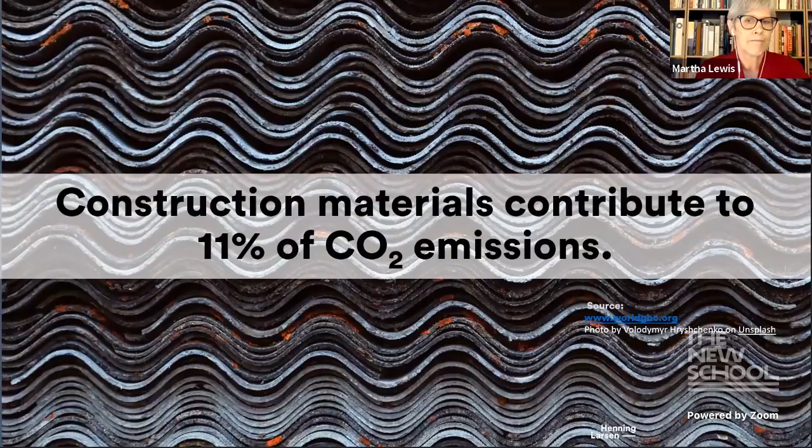The UN has high ambitions for planetary well-being, and one of these is a drastic reduction of the production of hazardous chemicals. Unfortunately, the reality is that this trend is going in the opposite direction. Global chemical usage is expected to double within this decade. This is particularly relevant for the construction industry because this sector is the #1 end market for global chemicals. In fact, it's larger than the next 3 markets combined.

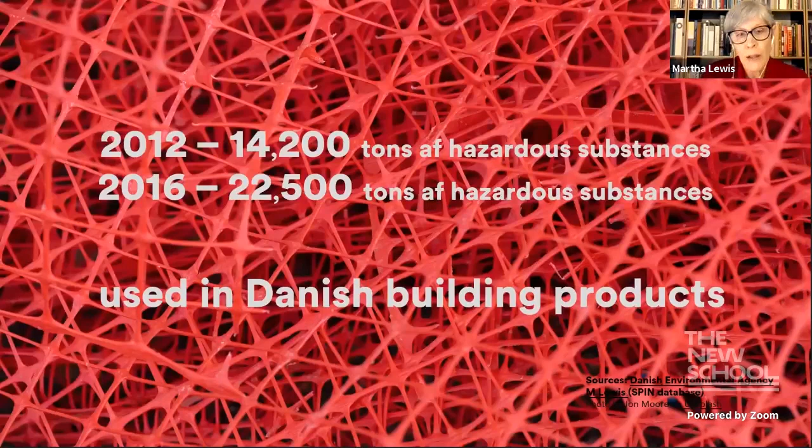Even in Denmark, there's a clear increase in the usage of hazardous chemicals in building products. From 2012 to 2016, there was a 58% increase in hazardous substances used in building products. This occurred in parallel with an increase in the amount of square footage that was built in Denmark.

The Danish EPA commissioned a survey in 2016, which concluded that there were 48 hazardous substances used in Danish building products. Substances that are, for example, carcinogenic, mutagenic, reprotoxic, hormone disruptors, or acutely toxic in water environments. The survey is interesting because it identifies in which building life cycle phase the substances are problematic. It zones in on construction, on the use phase, and on the third phase, the end of life phase.

And the results show that half of these 48 hazardous substances are problematic in the end of life phase, in the demolition phase, in the waste phase. If there is any authentic intention to limit consumption of virgin materials by encouraging recycling and reuse, then these hazardous chemicals need to get out of our recycling stream now.

Last week, a disturbing new book came out with a sober title, Countdown: How Our Modern World is Threatening Sperm Counts, Altering Male and Female Reproductive Developments, and Imperiling the Future of the Human Race. Authored by Shanna Swan and Stacey Colino, it's based on extensive research which identifies the cause of these creepy changes to be environmental chemicals. That is a class of chemicals called endocrine disruptors, which includes bisphenols, PFAS substances, and phthalates.

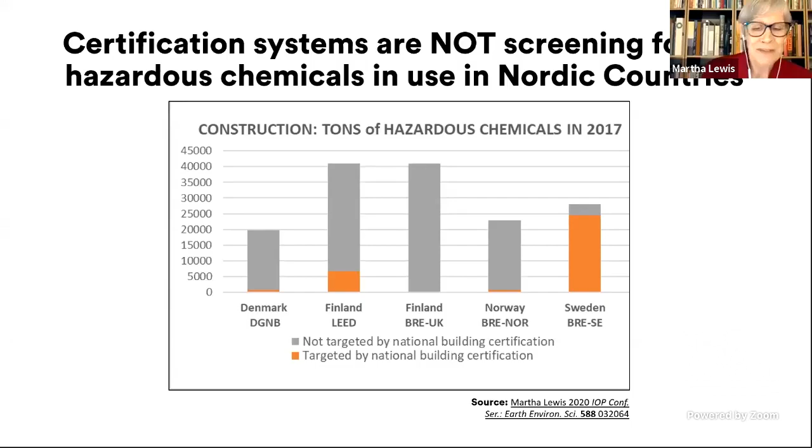So to return to carbon and the climate crisis, the building industry could be a major cog in the limiting of carbon emissions. However, it's absolutely essential that we make well-founded material decisions on the projects we are working on right now, today. The less accumulated carbon released into the atmosphere in the next 9 years means the less that has to be extracted from the atmosphere in the future.

This is one of the reasons why we encourage you to prioritize the global warming potential in the A phase, in the production phases of the products. To sum up, I strongly advise a priority list for choosing building materials that emphasizes low carbon or sequestered carbon, that screens for hazardous chemicals, and to encourage you to think design for disassembly into your details, into your specifications, into your projects. Thank you.

Pelle, it's all yours. Thank you very much. And thank you very much for having us. It's fantastic to have this kind of discussion at this time. And as I can see in the participant list, it seems that quite a number of people are joining in on the conversation. And that is definitely the experience that I am having these days, that it's gone from being a quite nerdy subject to become almost mainstream. And that is, of course, really lovely.

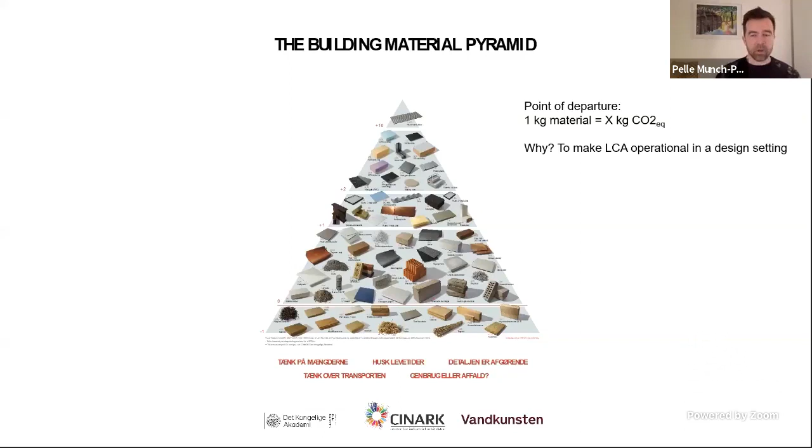So on one hand, we could see we had all this data, and the data was emerging at this time that we could actually see that our material choices had real impacts on the environment in a number of ways. So the pyramid is an attempt to try and make all this data tangible and sensuous in a way. And in its simplest form, because it started out being a poster, it just showed how much 1 kilogram, and that is approximately 2.2 pounds of material, had already done to the atmosphere in global warming potential.

So basically putting a value or placing it in relation to other materials, how much CO2 equivalents the material had caused just in its production. Not in its entire lifetime, but in its production. And here we are talking about CO2 equivalents. So there are other greenhouse gases, and in these kinds of calculations, they are recalculated into CO2 equivalents, just to get that clear.

But in the new version that we have done, we've moved the poster into a more dynamic tool where you can make your own kind of pyramid, and we'll return to this at the end. But trying to make it more interactive, we've done it with this fantastic architectural company called Vandkunsten in Copenhagen as well, that's helped us digitalize this. And now it's possible to put in your construction or some of your construction and get an idea of where you are going wrong. But we'll return to this. Next slide, please.

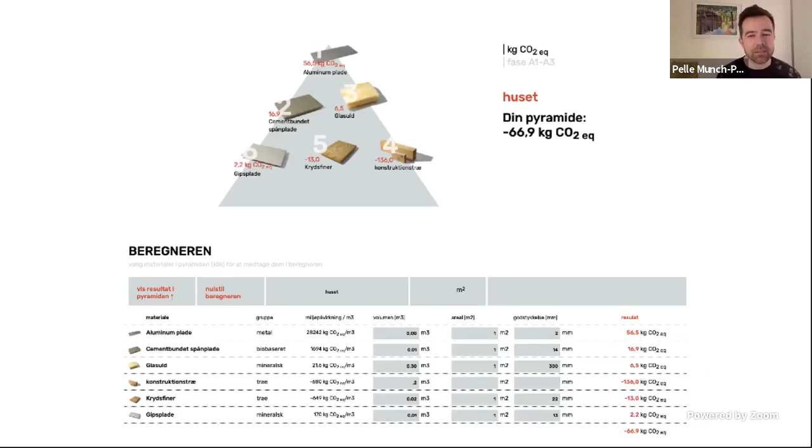But the idea is basically to take all this raw data that seems to confuse people and seems to not alter design, because we've seen many examples of extensive LCA analysis and a lot of data, and we could see the tons upon tons of CO2 released into the atmosphere by architecture, but we had a very difficult time figuring out how that should change our design. So we did not, and we continued to do architecture in the same way we had done the whole time.

So my whole PhD was basically trying to operationalize this kind of data into something that I could see could change design. So what I did was basically to try and make this data sensuous and to put it in a food pyramid where you can use this analogy to figure out that, okay, there's something that's the red beef at the top. Maybe we should think twice about using it, or at least make sure that we get enough out of it if we use the red beef. And then there's the bulk stuff at the bottom where you can maybe be less critical, and you maybe should put it as the base of the construction.

Next slide, please. But before we dive into what I really think the pyramid works well at, and how and why I think it's getting a lot of attention these days, I would just like to put a flag that basically this should be debated in the context of your own country. And here I'm going to talk just a little bit about the differences between America and Denmark.

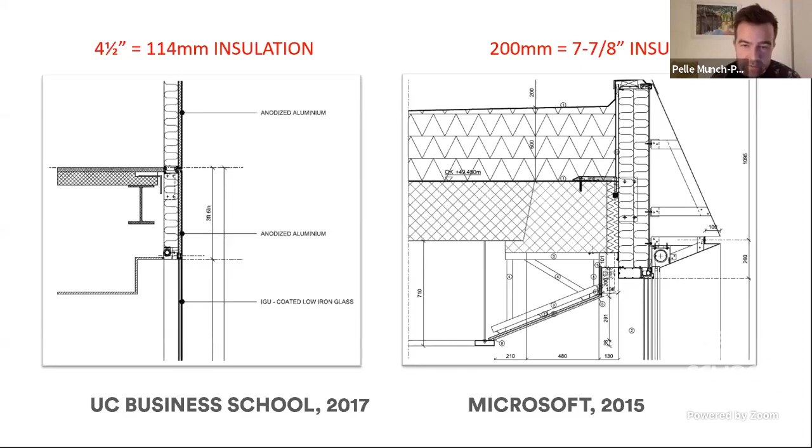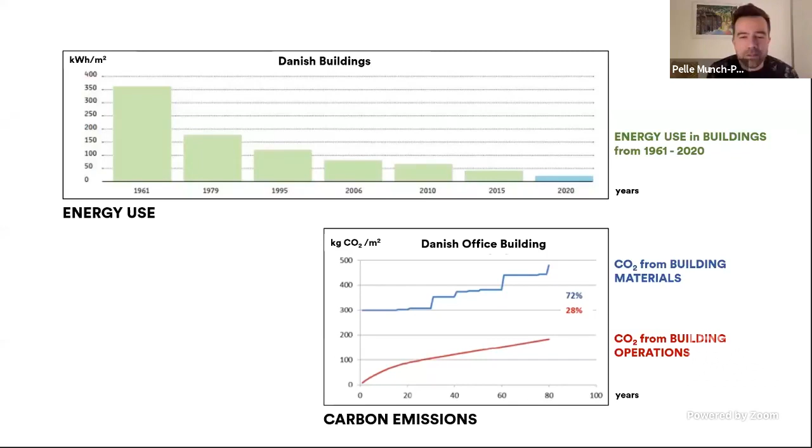So returning to the building material pyramid, how should you view it? What I think it really can do is that you should not view it as an answer to anything, but as the first question and a line of questioning that we need to change. And when you listen to what Martha said, we need to change everything we know quite fast. The general ideas we have about consumption seem to be completely wrong. And it seems that all the ecological and ethical aspects of consumption have gone out the window at some point. So we need to find ways to ask the right questions. And what could those right questions be?

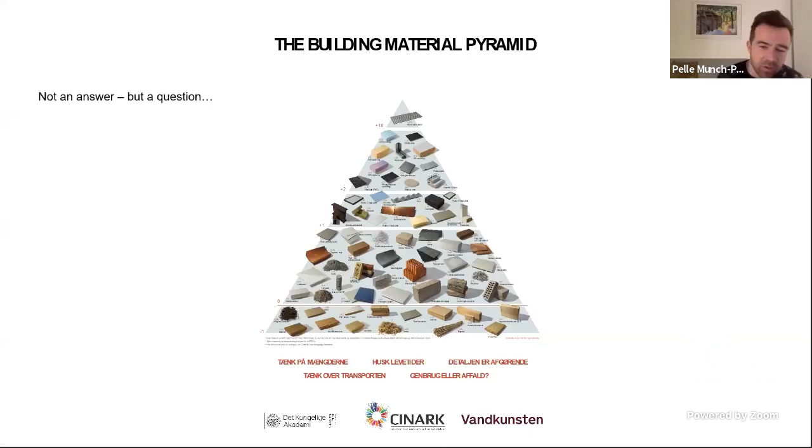Well, here I'm going to present a couple of them that I've seen students and people in practice beginning to have these kinds of conversations about when they meet the pyramid, because of course it's quite simple, but it's simple and maybe confusing enough or surprising enough that people start having really valuable discussions. And by doing so, I see design changing. So next slide.

And what kind of discussion does it open up? Well, they look at materials and they say, what about time? Well, some of these materials will live for a long time, maybe even forever. And some, if you put a piece of wood out in the yard, it will be gone in 2 years. There must be something about time to be said about this. And of course there is. We should definitely think about the longevity of materials, and Martha also touched upon this.

But the reaction quite often is that we should just build with concrete then, because concrete can last 2,000 years or more. And that's what I by now call the Pantheon thesis, basically that because we have this one building that is essentially of concrete that's been there for 2,000 years, it does not mean that materials will last that long, because what governs the lifetime of materials has, at least in my experience, very, very little to do with the material itself. It has something to do with what system it's in. It has something to do with politics.

We are tearing down a lot of 60s and 70s buildings in Denmark now made from concrete because they're on a ghetto list. So it's a social political thing that determines the lifespan of those constructions. It can also be that it's cheaper to tear down and build new, economical reasons, and a lot of cultural reasons. And just maybe sometimes we don't find it pretty and we want to do something else.

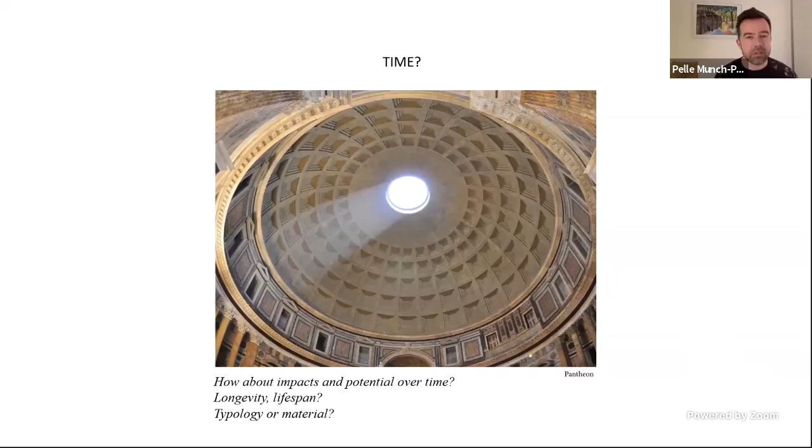It's like, you know, it takes more than one ingredient to make a dish. And so it does with construction as well. And many materials have different functional uses in construction. So can you really compare insulation material to a steel beam, for instance? Well, I think you can, and I think you should. But of course, you should take into account that they have different functional properties.

They are also placed in different ways, and some you will use quite a lot of, and some you will use a little of. So basically, like the food pyramid, you shouldn't think it's just an answer and then eat only the one furthest down in the pyramid, because then you get other health problems and you won't get enough vitamins. And this is exactly the same thing you have here. We have to think about the full scope of construction. Next slide.

Another thing that I think Martha also touched briefly upon, and it also relates back to how we understand longevity and lifespan, is that maybe we have to construct in a way where it's not the building lifespan that determines the material lifespan. And of course, then we need to design for disassembly, and that opens a can of worms in how we construct, at least in Denmark, because today we have such highly insulated buildings, they are also completely airtight. And if you want to make something highly insulated and airtight, you have to use glues.

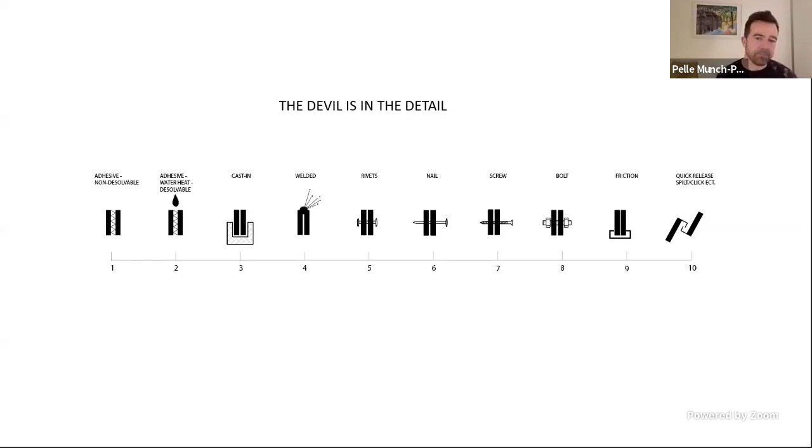Next slide. Because maybe here, from this gloomy look at the terrible state where we'll all be infertile in 2045, which could just destroy our year if it wasn't weird enough to begin with, I think there's actually a really good thing to be said about this potential, because it brings a new kind of beauty into architecture. It has an almost ornamental quality when you start really designing for disassembly, because everything needs to get out of the hidden layers.

You can't hide anything. Everything needs to be intuitive, and you need to be able to take things apart quite easily, and maybe even without instructions. So this is just one exhibition that I did where I tried to do quick release friction-based construction, and this is wall panels insulated up to standard in the building code. It's made from wood and recycled wood and cork, and then the only steel, the only top of the pyramid product is the thing in the middle, the bracket where you can actually by hand release the whole thing.

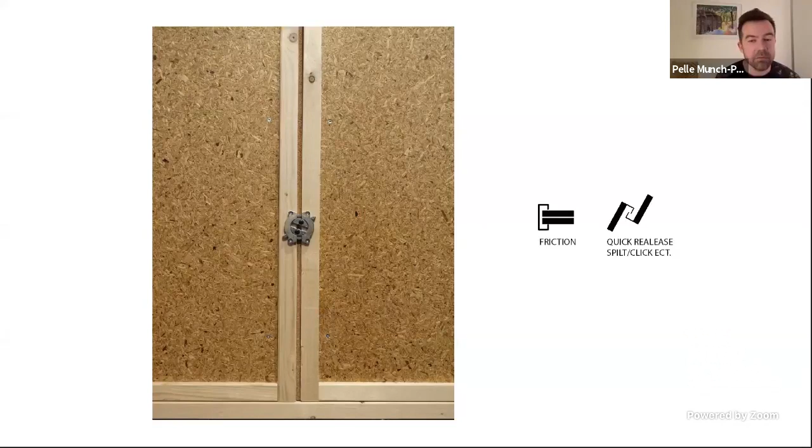And of course that raises questions of, could you do that, and what about the kids? They will demount everything. But there are things to be learned from this kind of construction, and that could be taken onto a level where it would be even safe. Another thing is, next slide, that we've done this for quite long, and I have many examples of this, but here I've only chosen two, that this development we've had in construction is not doing the work it should

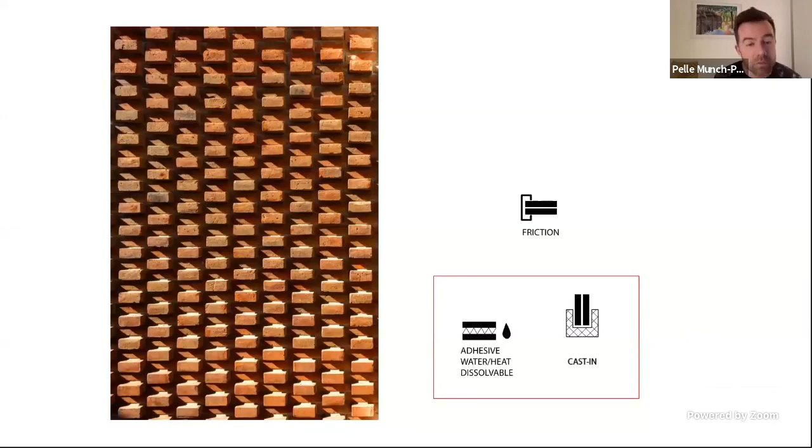in this kind of way. Because if you look at brickwork, and we have loads of brickwork in Denmark, historical buildings and new buildings, they used to be done with limestone mortar, and the limestone mortar was weaker than the stone, and that means it's very easy to take apart and reuse. And then at more or less the same time as the energy crisis, we found out that this very, very strong material of cement could be used instead of limestone. And now you can't take brickwork apart without destroying everything. Basically, it's gone from a good, friction-based kind of construction into a cast-in adhesive kind of understanding, and that just makes it so that you can't reuse the materials.

And the next one, and I think that's the one that we could really go on and on about, but I'll just do a short presentation, is where you basically end in the complexity of asking questions. Because if you're really beginning to look into what materials we use and how we use them, we end up in these really interesting discussions about synergy. Like one material has a tendency to point to the next. There's nothing, as I just said, called a brick wall. It does not exist, because you can't have a brick wall without mortar. And the list goes on, the interdependencies are many and abundant.

And I think even in how we construct today, we end up in situations where you have to ask, how do we understand human well-being in construction? Because I think we have to renegotiate or redefine how we work with human well-being in architecture. Because now, at least in the Danish context, we want 24 degrees Celsius in an indoor climate year-round. At the same time, we have these completely closed constructions because we want to keep the energy inside. So we end up with this massive array of machinery, making sure that we have that right balance all the time.

At the same time, we have a tendency to use a lot of glass, and that means that even in a Danish country, where people used to think that we had polar bears walking around, every modern building overheats. So we have a massive amount of cooling now. And we're quite good at it, so it's not that, from an operational point of view, it destroys our energy calculation, but the amount of material that it introduces into the building is enormous. And we often end up having to build twice the volume, because half the volume is machinery compensating for the fact that the building can't stand on its own, that you cannot provide an indoor climate through passive means.

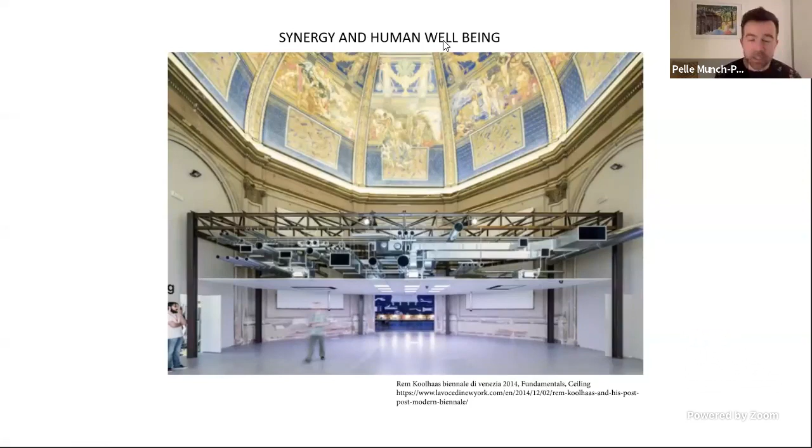So I think there's both a discussion about when should we wear a sweater inside, should we really try to figure out new standards of human well-being in construction, but also looking at the whole synergy, and how one simple choice in a sketch proposal of a glass building somewhere in Denmark will end up with so many materials and technological compensation in that building that you cannot bypass, because your initial material choice was basically wrong, or at least that could be argued. So, as I said, we could go on and on about this, but I think we should continue and give you a brief introduction to how this new digital version works.

Sorry, I'm muted. I will share the pyramid. One quick second. Thank you.

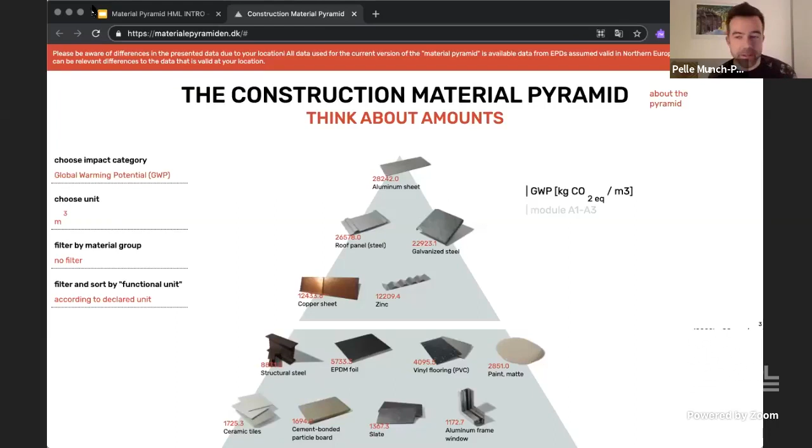There is a question, just while we're waiting for the pyramid to come up, about how we can access the pyramid in English. It's from an anonymous attendee, so we don't know where they are. It should translate into English straight off the bat if you access it from an IP address not in Denmark. So yeah, if you're not in Denmark, then you should see it in English.

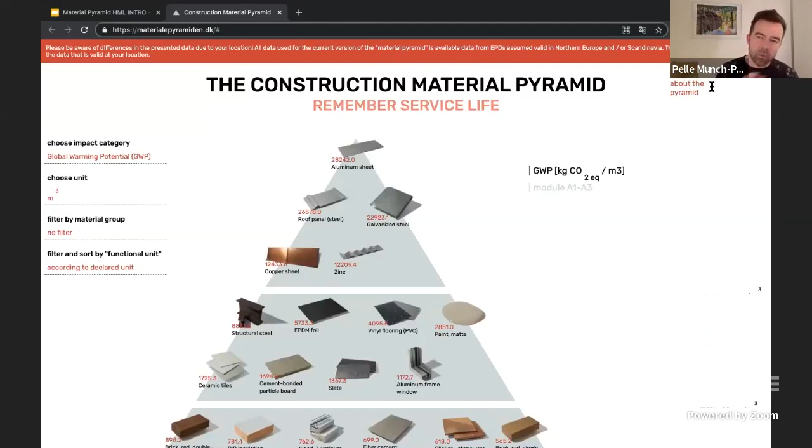But there are many things to be said, and I think you should know that most of the data is mostly relevant in a North European context. That doesn't mean that you can't use it in other places, or it won't be more or less the same image. I think it will, with minor differences. But at least, as always when we deal with data, we should be cognizant of the fact that this data is from a North European context.

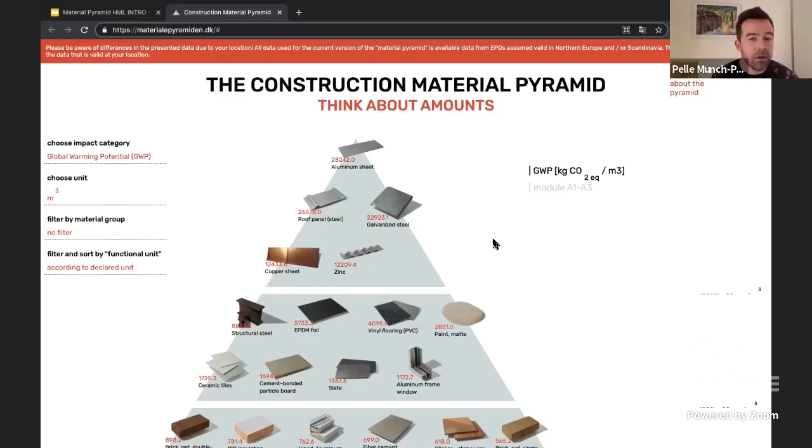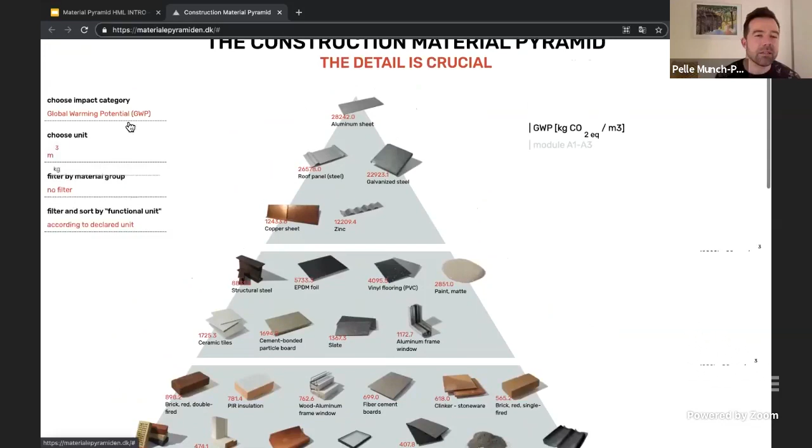Yeah. But it works like this, and here Leila will press some. Basically, first you have to choose your impact, and you can choose your impact in the top left corner. And there could be many impacts, and loads of things we could talk about. It would be lovely to have stuff like health and chemicals in here. It would be lovely to have stuff about scarcity, and so many problems are tied to our material choices.

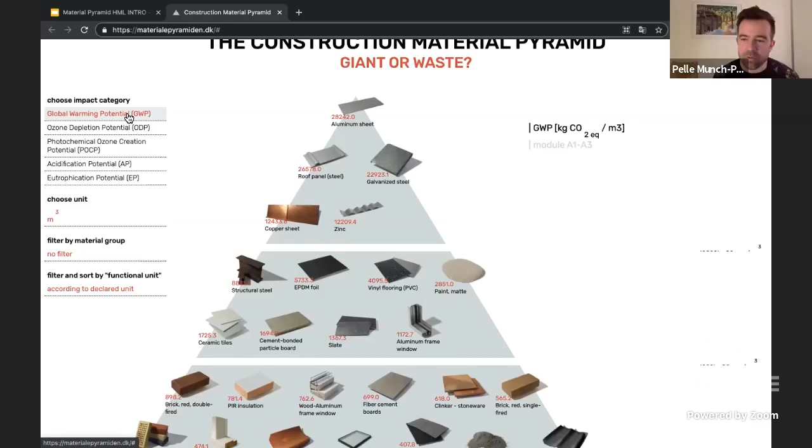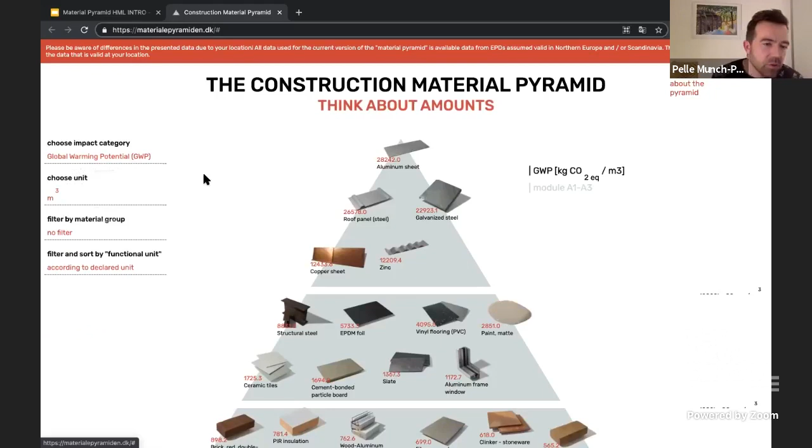But here is an array, and the good thing about this is that you get an idea that there's more than one thing going on. The good thing though is that you will often see that one kind of impact has a high impact in another place as well. Then you can choose your unit, and this is a matter of taste, if it makes more sense to you to have it in kilograms or pounds, or in volume in cubic meters. I'll pick kilograms.

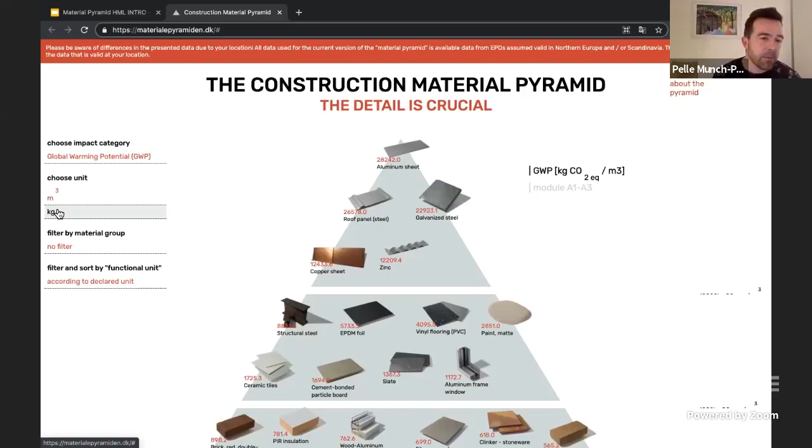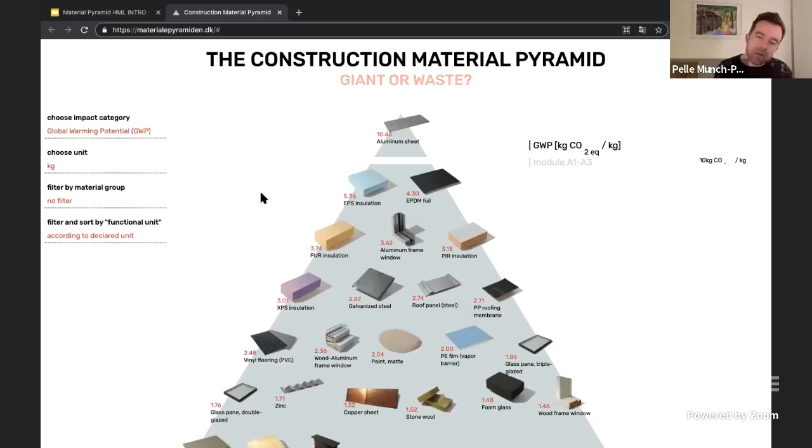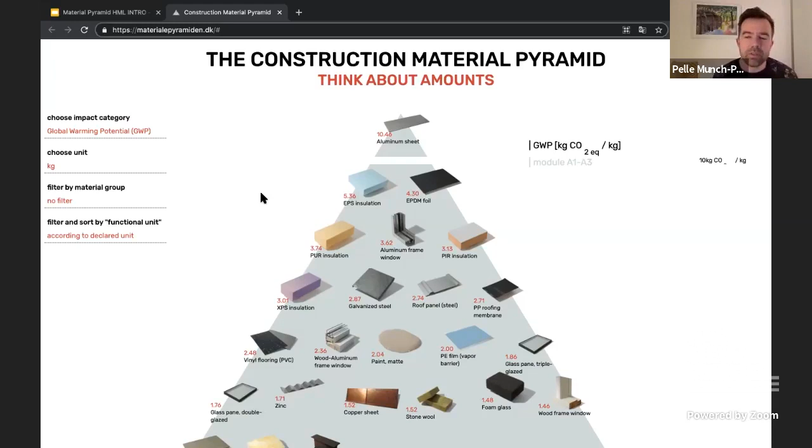Yeah, I love the kilograms one, because at least in a Danish context it's very intuitive. Most Danish people will have an idea about what 1 kilo of a material might be. So they can very fast say, okay, if it's insulation material, I might have this much. If it's a brick, I'll have this much. And if it's iron, I'll have this much. So they usually get a quite intuitive idea, and it makes it quite operational, so you can use it fast and without too many clicks. And just for translation, 1 kilo is about 2.2 pounds.

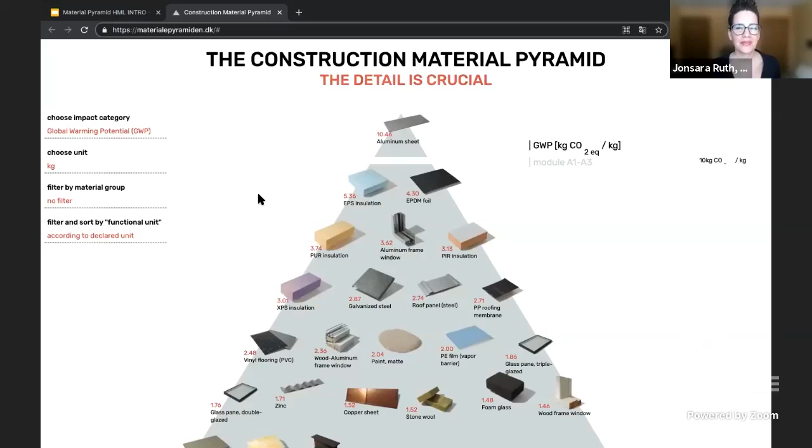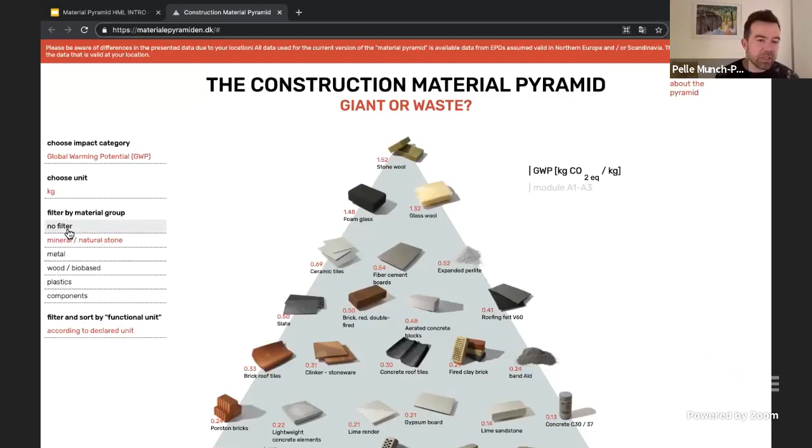Perfect. And then you can filter by group as well. Oh yeah. And then the pyramid will change. Sorry, I'll be quiet. No, it's fine.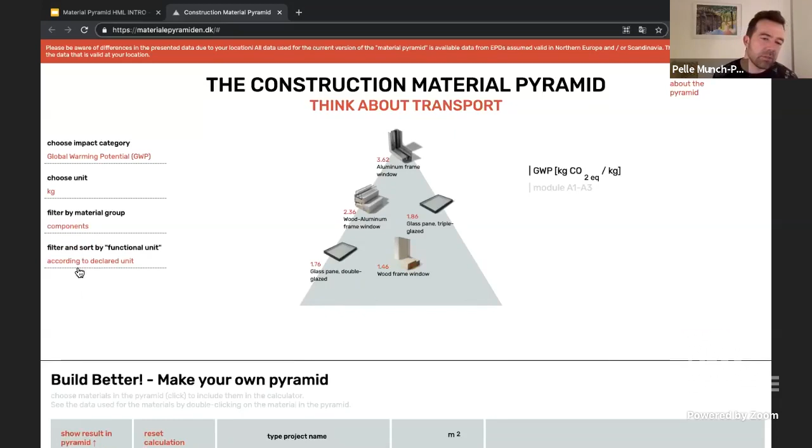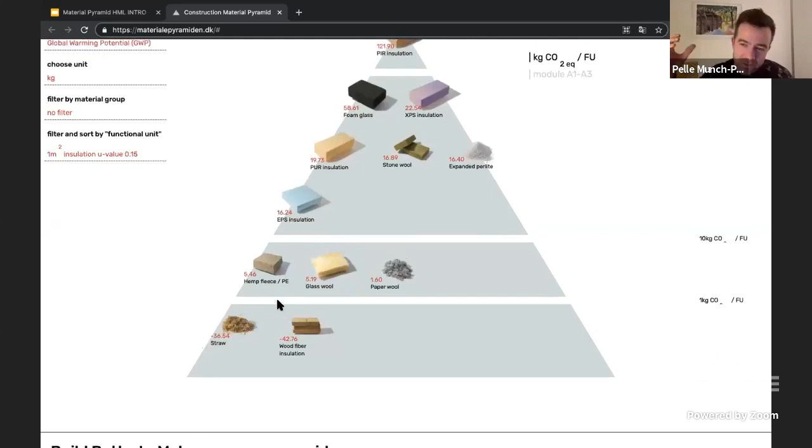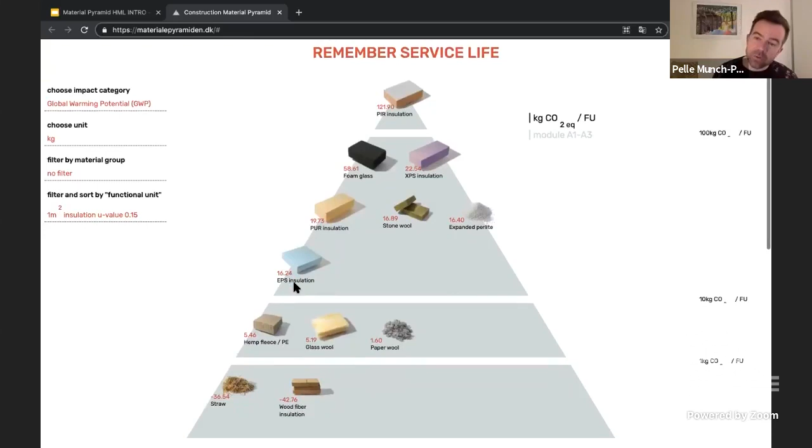And then the functional unit one is an interesting one. If you press that one as well, you can, for instance, take the insulation to U value 0.15, because some of the very low performing insulation materials from a CO2 point of view are very effective insulators. So you would end up using way less of that material than if you're using something like wood fibers, where you have to use a lot of material to get the same effect. So that is also one of the discussions you need to have.

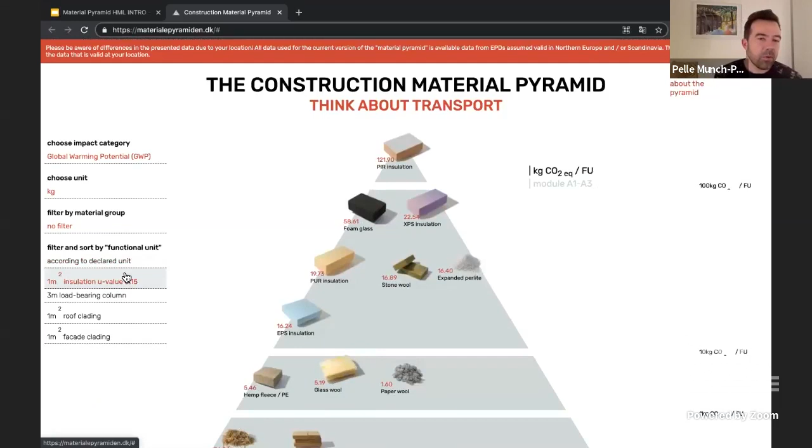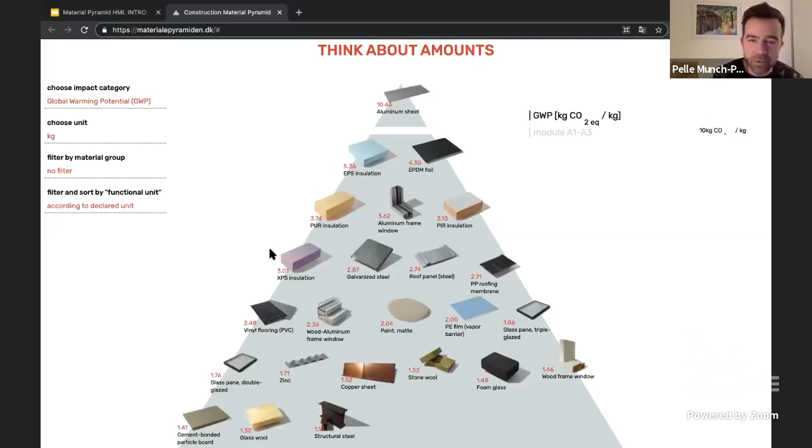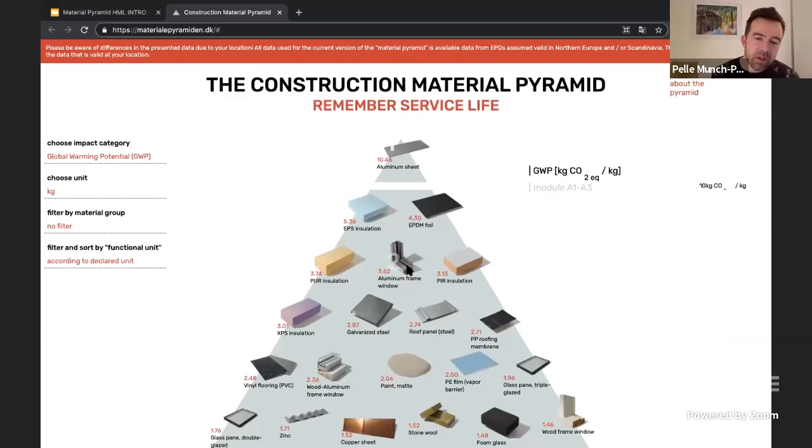Mm-hmm. But if you press the top global warming potential again to get the full pyramid, then basically the idea is that you can just press some materials, and here we could just randomly press some that you find interesting, to select down into my list. Yeah. So basically, you could be sitting with a construction and say, okay, I have this kind of construction, let's have a look at what that means, because as I said, the pyramid can only take you so far.

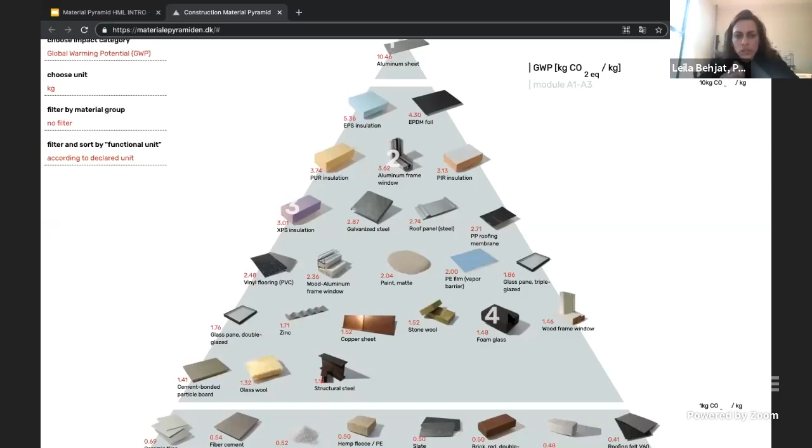So let's say we have these 4. I'm picking aluminum sheet, XPS insulation, aluminum frame window, and then foam glass. That's a weird construction, but for this, it doesn't matter. So then you get your materials down there, and you can put in the amount, and this can be done quite fast. When I've seen it done with students, they will sometimes just do a quick guesstimation: okay, I know approximately it weighs this much, I'm using more or less this and this.

And then they'll get the idea, because then you can show the result in the pyramid on your left with red. Yeah, and if you press show result in pyramid on your left, then you get your own pyramid where you can see, okay, these aluminum sheets I might have to look into.

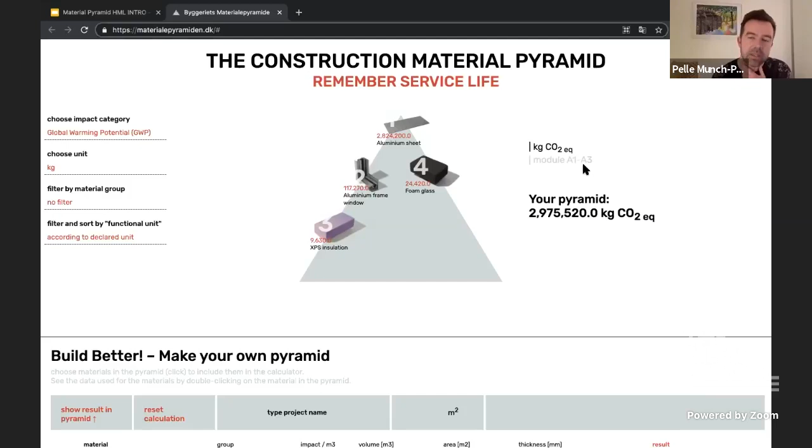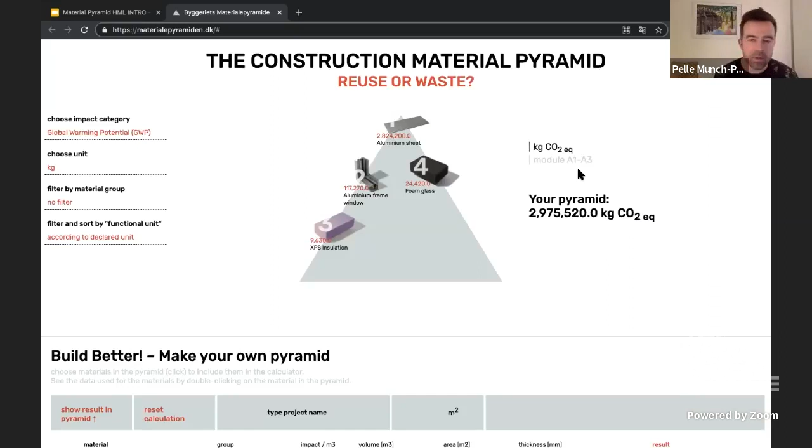Or if I use them, let's make sure that they last a long time, that they can be reused, that they can do everything for us that we needed to do. So it will highlight what kind of, and you put a context to the discussion that I just talked about. So I think that's the idea behind it.

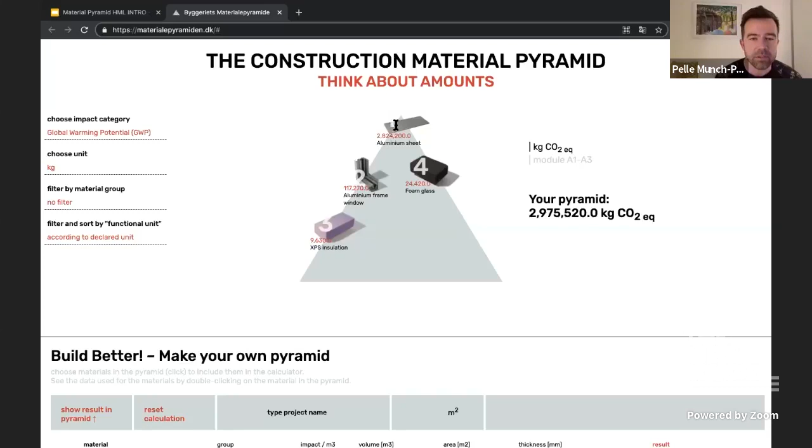What I would like to just add is that you can also double click one of the materials, and then it will open in a sheet on its own, and here you can get the source of the data and all the information that you need. If you find something weird, you can go down to the source and press on that. You don't have to do it now, but then you go to the EPD data that's behind it.

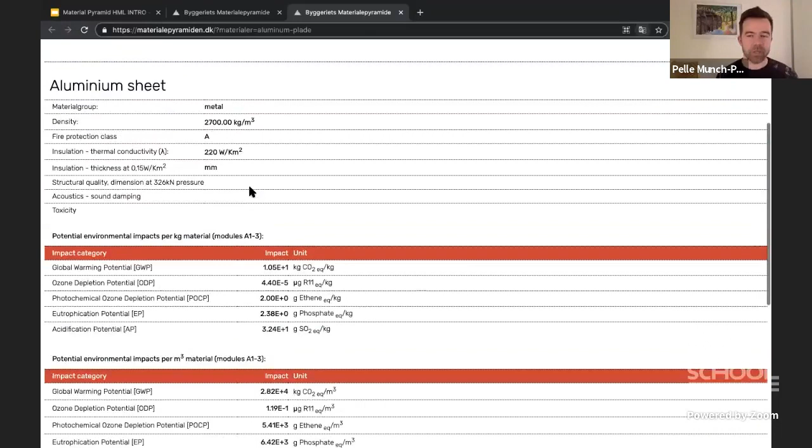Great. So I think that concluded the presentation. Thank you so much. Thanks for walking me through. Fabulous. Thank you so much, both of you. Excellent. And now we'll leave it to you.

This material pyramid has simply gone viral, and in this sense has already been extremely successful as a communication tool and reaching quite a wide audience. Congratulations on that. One of the strongest criticisms of the pyramid is that it simplifies a truly complex process. On the other hand, one of the greatest praises of the material pyramid is that it simplifies a truly complex process. Could you put a few words on that dichotomy, perhaps with your target audience in mind?

Yeah. Well, you're absolutely right. Every tool like this and every model is a simplification. Sometimes I'm astonished that the criticism is that this does not show everything about how the world works. And I'm like, no, it doesn't. I haven't seen that model yet. And I don't think it would be that interesting even if it existed, because what we have to do now is start thinking in completely different ways. So we have to get started.

And to say that we have to start thinking in every way completely differently would mean taking on complexity that we would drown in straight off the bat. So we need to find ways to open this discussion, and simple versions are the only way to do that. What's important if you do a simple model is that people take ownership of the complexity, that it starts you on a journey where you wonder and start asking questions. You're like, that can't be right. Like the simple fact that concrete is not that high up in the pyramid.